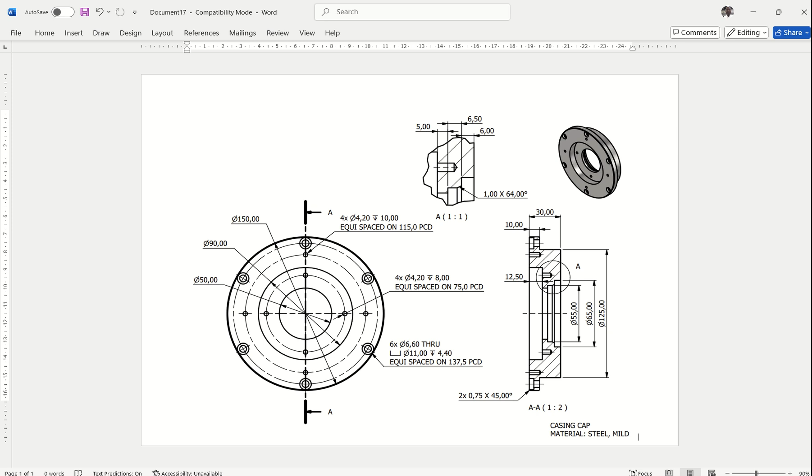For the casting cap, I put this image so that you can capture the measurements as we go on, because the other screen is very small. Then now I go to the software. I put the small version of the dimensions on the left so that you can see it. But for any more reference, you can go back and look at the previous screen.

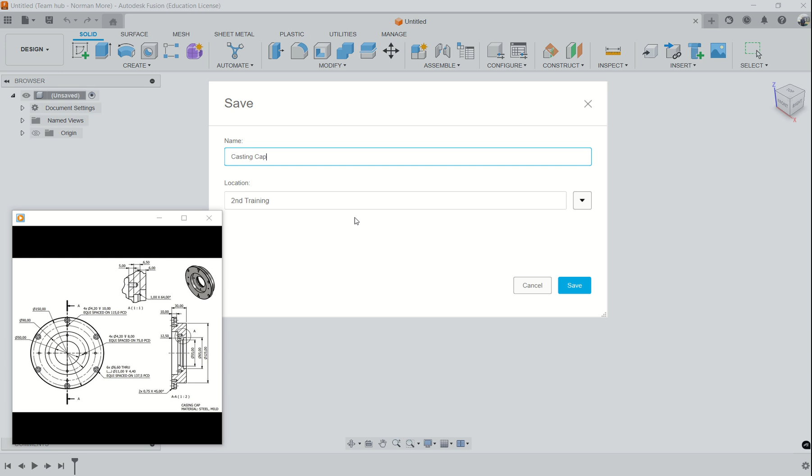Let's start. As usual, start with saving. This one we shall call casting cap. Please make sure you put it in the right folder. For me, it is 2nd Training. And then we start drawing.

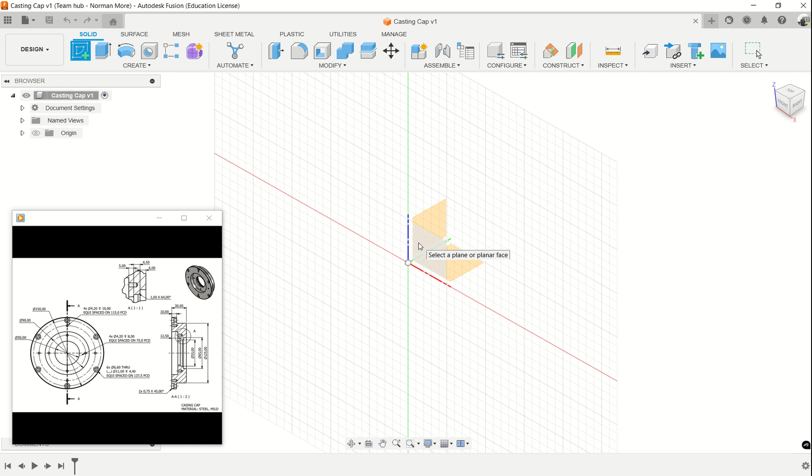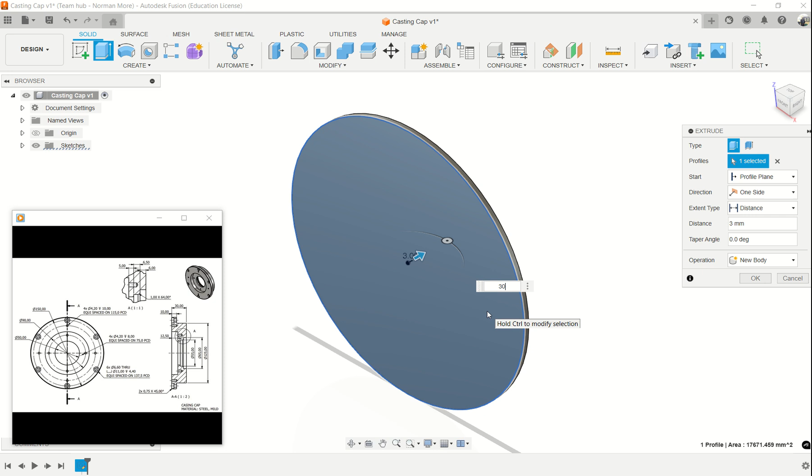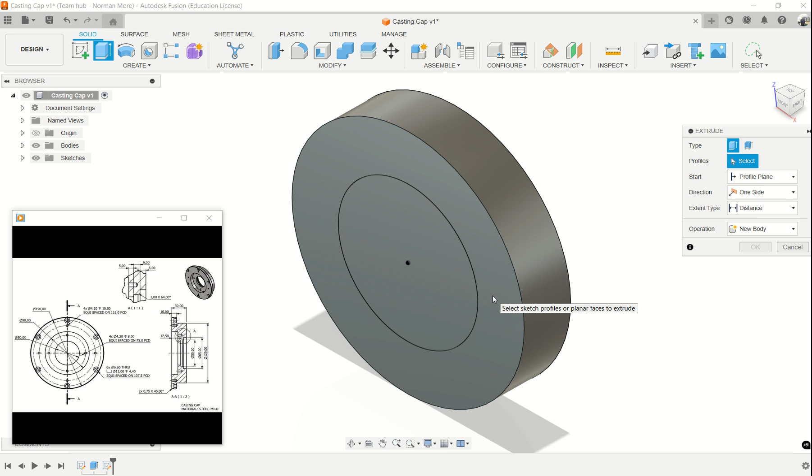I'll pick the front view this time, and draw the largest diameter, which is 150 from the drawing, and extrude this by 30 millimeters, which is the overall width. Then I'll draw another circle here and draw my first cut, which will be at 90 mils. Extrude, the depth of which is 12.5, with a negative.

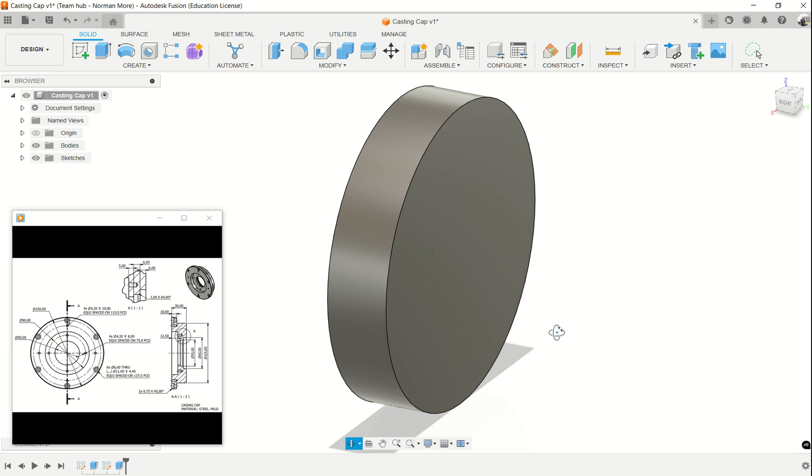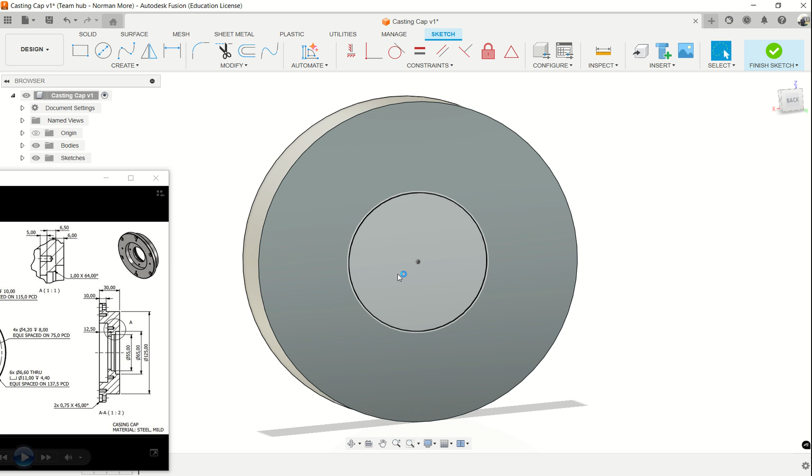Because the next one is a small diameter, we start from the back. I click at the back, and there I will draw according to this. If I expand this a bit here, you will see the diameters as they go. So the next one is 65. I do 65, enter. And the depth of that one is 6, so we extrude that to -6.

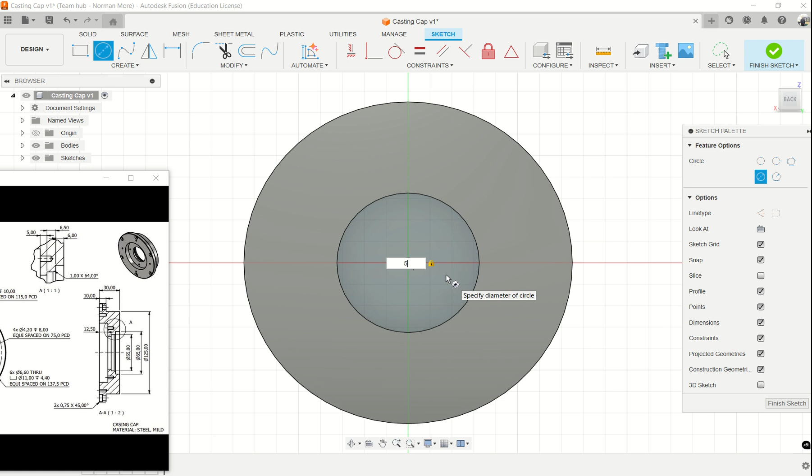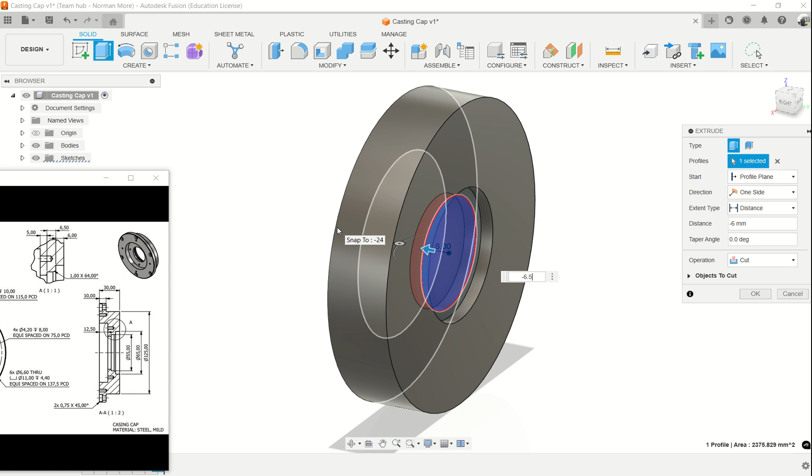Then I click on the bottom surface and do another sketch. This time it's going to be 55. I click on that, extrude, and that is negative. That one is 6.5. Negative 6.5, going inside.

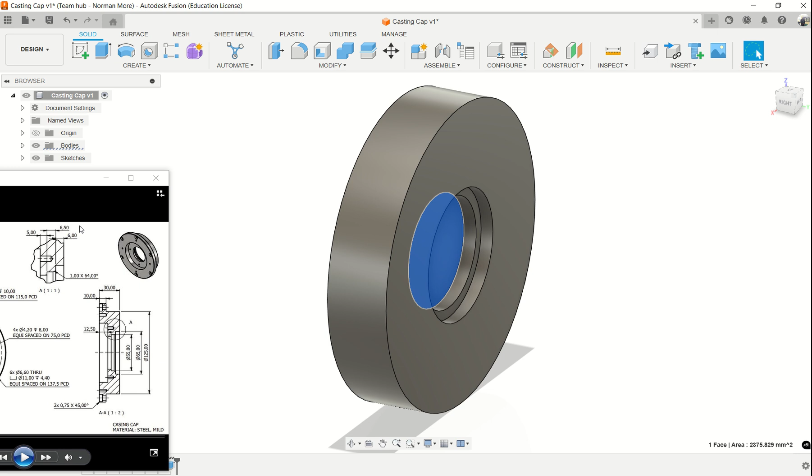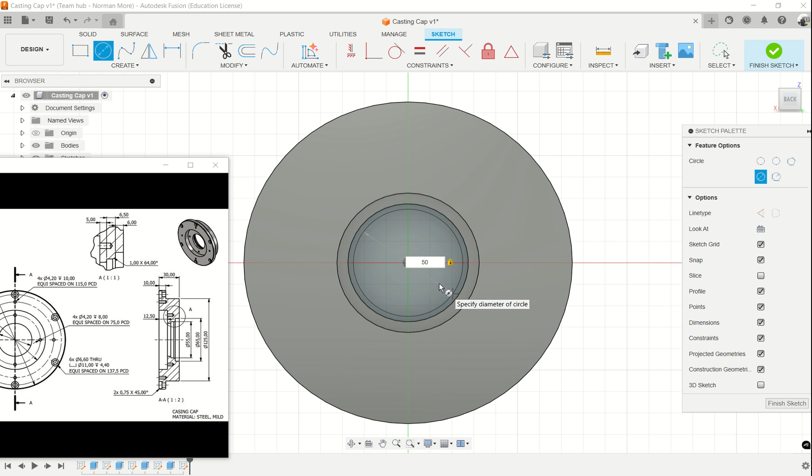And then the next one will be 5 mils actually, and that will take on the inside diameter, which you can get from this other drawing, which is 50. So we do a circle, and that is 50. Then extrude that to -5. Should be able to go through. Okay, so that's done.

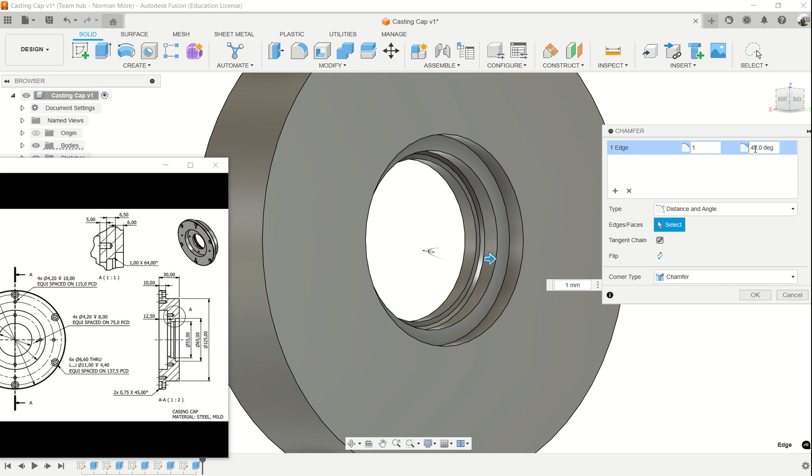We have a chamfer there of 1 mil inside this one, inside the second step. So we do chamfer, and then pick that edge, and then we need to change this into, it normally reads distance, but we need to change it to distance and angle. So we put 1 here, and we put here 64. I pick it. Okay.

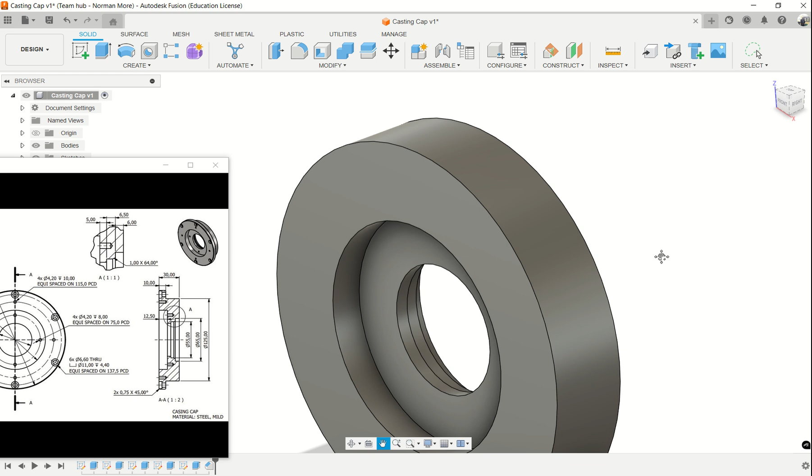Now that is as far as the walls are concerned. So if we go back at this side, then we are going to do another sketch and do a pattern. So these holes are 6.6 mils, and it's a counter bore on a PCD of 137. So I start with a PCD of 137.

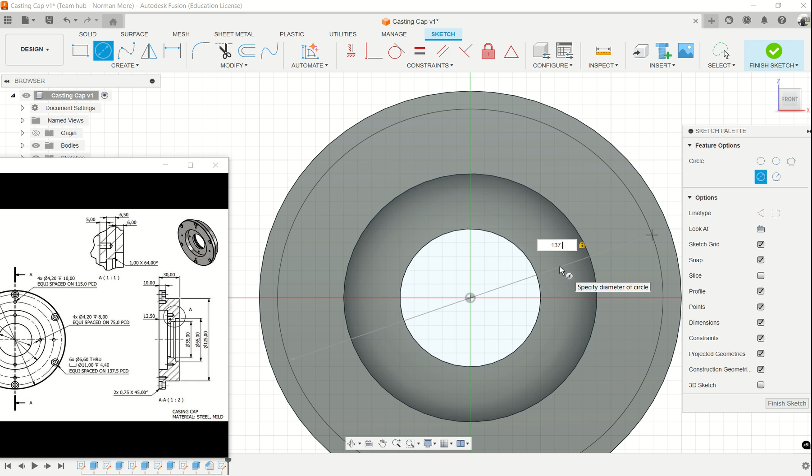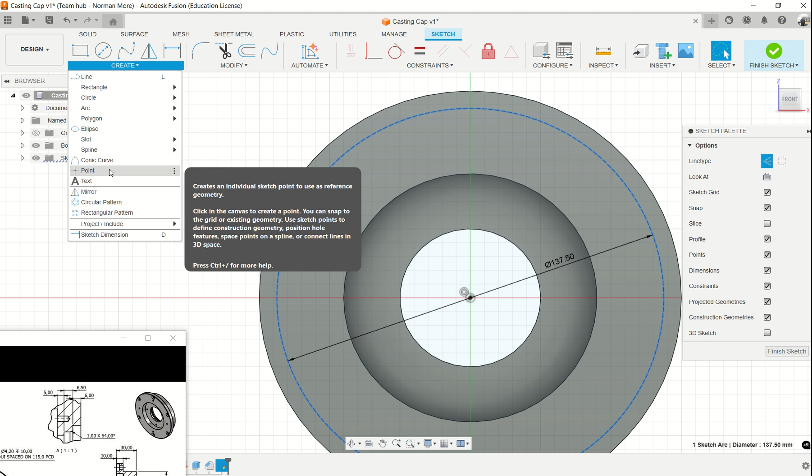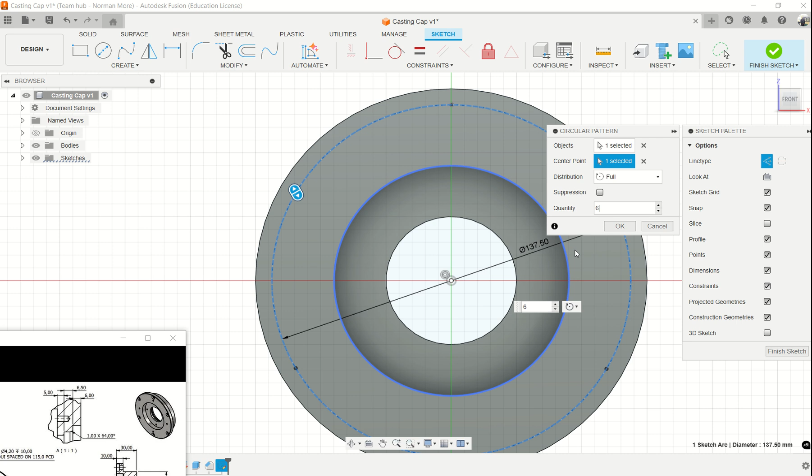137.5, and then I will just change that circle into a construction. And then, since this can be got from the hole tool, I'll put a point instead of a circle. So I just put 1 point there, and then after doing that, I pick a circular pattern. I pick that one as the sketch, and then I pick this one as the center. Change that one to 6, and then say okay. So now we have all our points. If you tilt it a bit, you can see the points there.

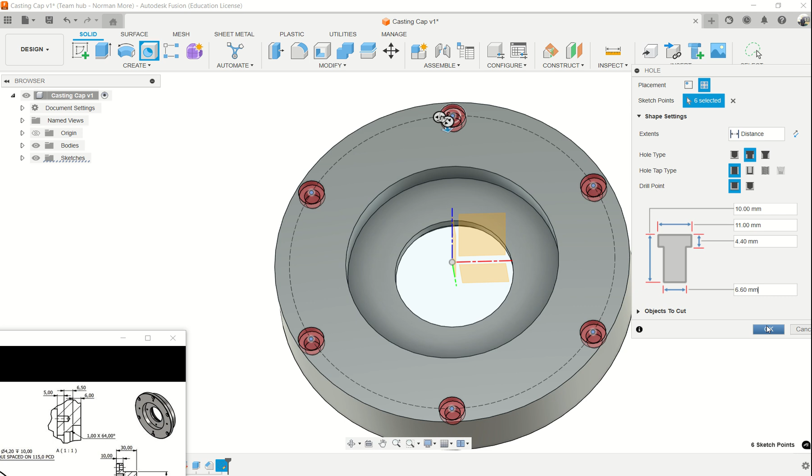Then I go straight to the hole tool. In the hole tool, if I just pick all these, then you can see you need to put all these. You need to change that, change the top of the counterbore, the depth of the counterbore, and then the depth of the holes, and then make sure that reads counter bore and also a flat bottom and a simple hole. And then you click OK. So that one is done now.

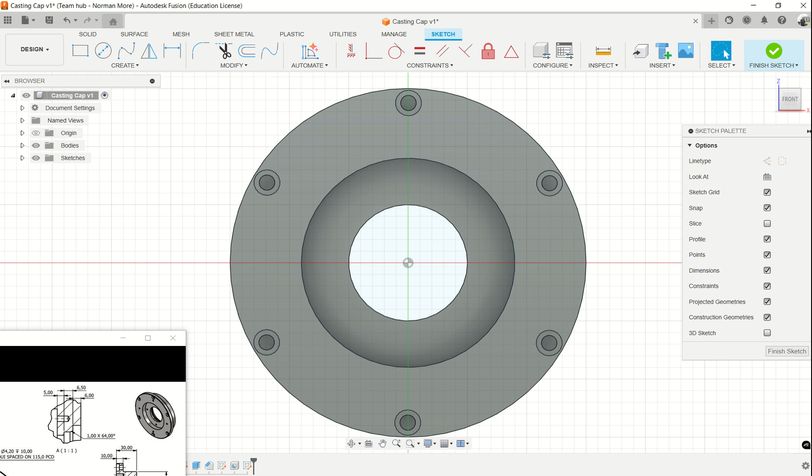After that, we have other holes which are from this end. So you click on that surface again. We draw sketch. We have 4 holes this time. Those holes there, 4.2, 10 deep, equal spaced along a PCD of 115. 115, enter. These are simple holes, so we shall just draw a circle and pattern it. So we go up here. The circle is 4.2.

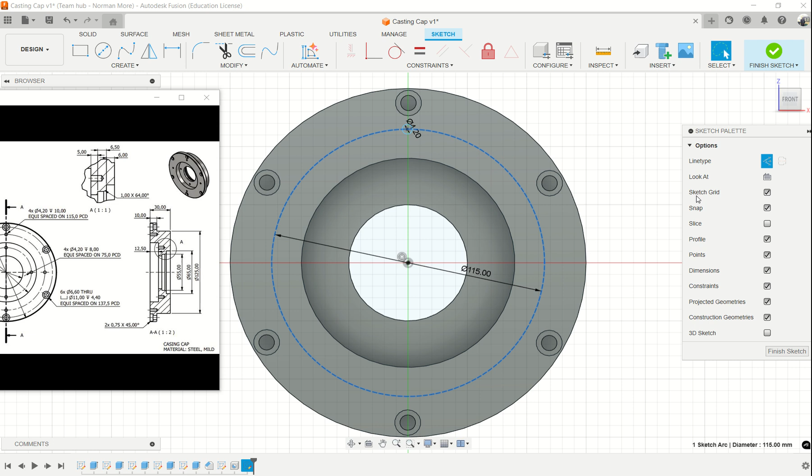Enter. We need to change this one into the construction so that it doesn't disturb us. So if I push this one a bit down, I can go back, make another circular pattern, pick that circle, select this one as our center point. We need 4 holes. Then I click OK. I chose the center instead of, so I need to go back and.

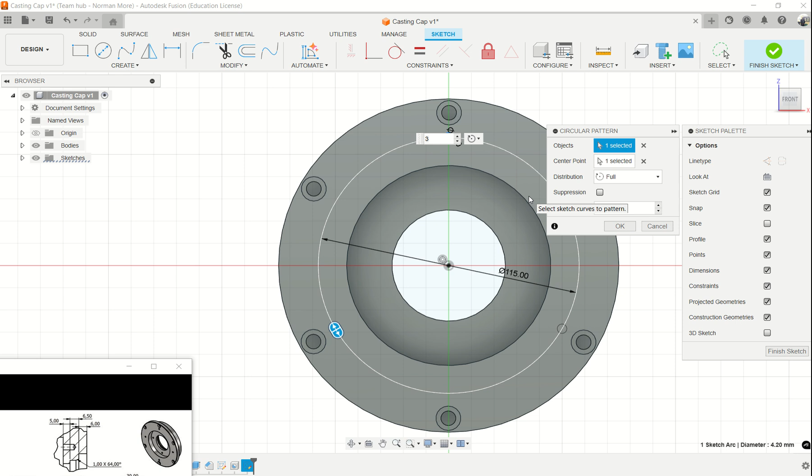I chose the center. So instead of choosing the actual circle, I chose the center. I'll just do Control Z, and then change that one. Then I go to circular pattern. Let me be sure I pick that one. Make sure I pick the hole. Yeah, and I put 4. And then I say okay.

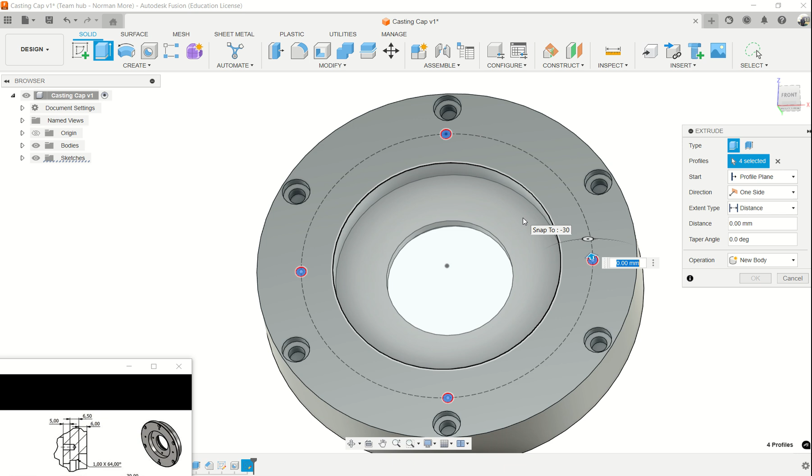Now it looks like holes. Then I say edit, tilt it a bit, and I click the holes. And the depth of the holes is 10, so it's -10. Let's see, okay.

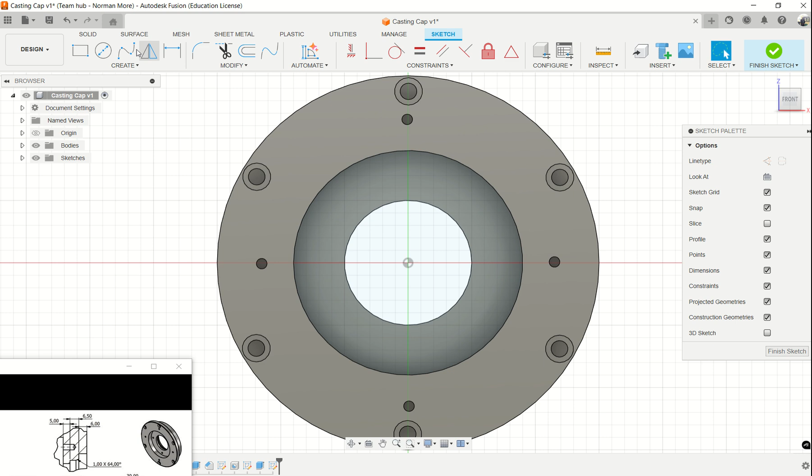Then we have another 4 holes on this surface here. I go to sketch. These holes are on a PCD of 75. So I put 75. Same type of holes. This one is 4.2. Change this one to construction.

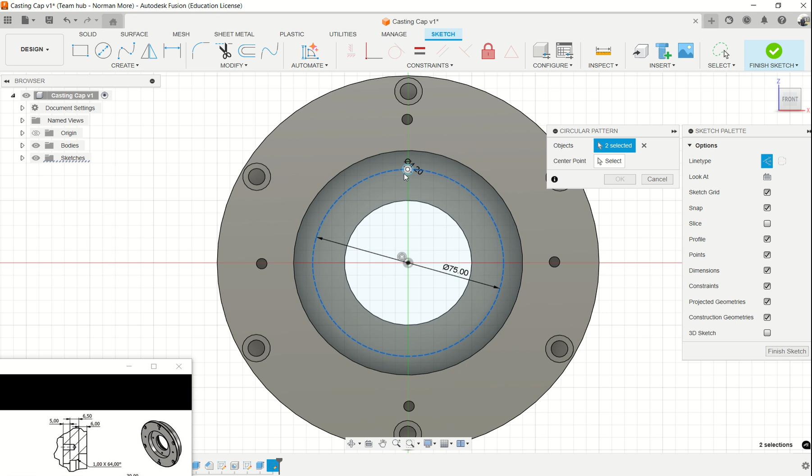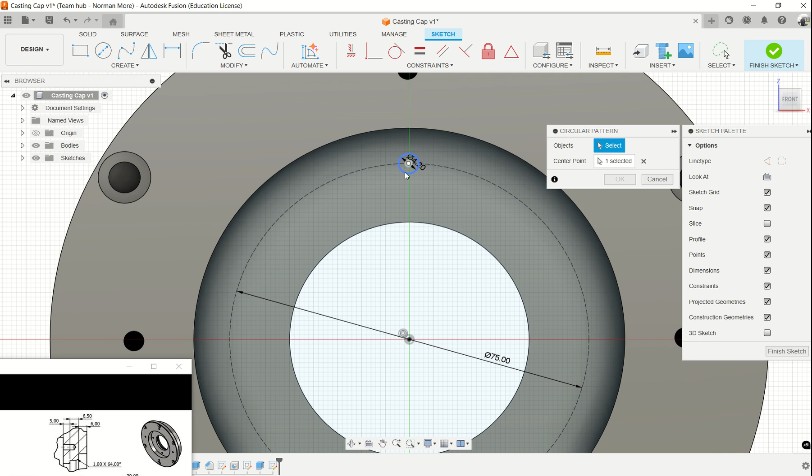Then I do a circular pattern. I pick this one as our sketch. Select this one and choose 4 of them. Let me see. Be careful that you choose the hole, not the center. So everything is okay. I do extrude.